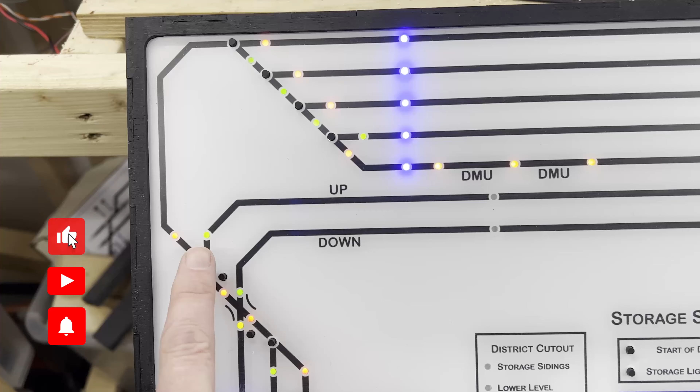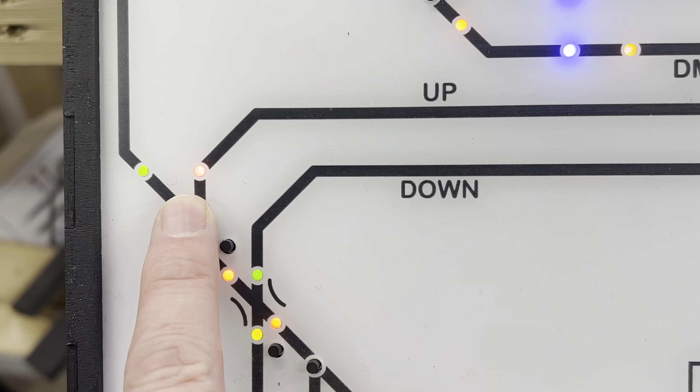This is the control panel that I purchased from Megapoints. It's a really nice panel, but when I looked at them again, I think they got really expensive. I'm not sure if he's still doing these panels, so I decided to try to make my own using the Bambu Lab 3D printer with the AMS option. So we're going to have a quick look at what I did.

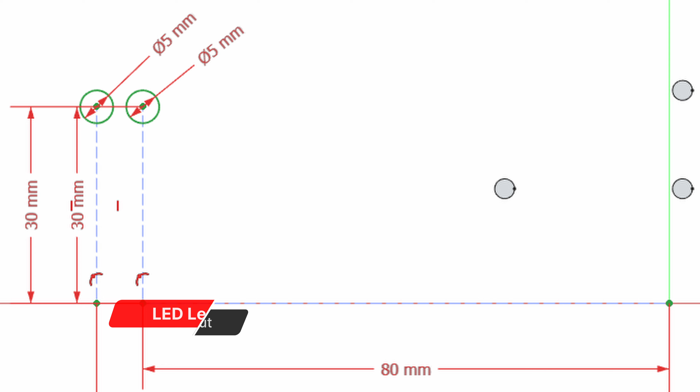I spent a long time trying to create this, and I realized that I needed to create lots of separate parts which I could mark as a color inside the Bambu Lab software. So I used FreeCAD, which actually is pretty good. I moved from Fusion because it just got really complicated, and I made lots of separate parts.

I had to print out the parts in kind of a 3D drawing so I could replicate this multiple times, effectively making a bit of a jigsaw puzzle. Bits could slot in - like this section here was built because I needed to make sure it was black, so I had to cut the circles out for the switches and the holes out for the LEDs.

I also had to make little separate parts for the LEDs so I could color those with a translucent filament. It all gets exceptionally complicated.

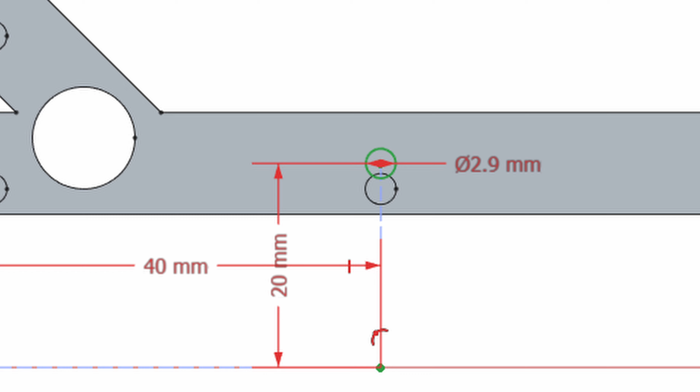So I had the actual holes for the LEDs so they could be a friction fit, and then the little kind of 1mm thick tops for them, so to speak, which would be the lens, the translucent stuff.

As I said, this took me a lot of time to do, probably months of playing around in the evenings and getting frustrated and starting again, and some test prints, should I say. Overall, it took a long time to actually get to the point when I was happy.

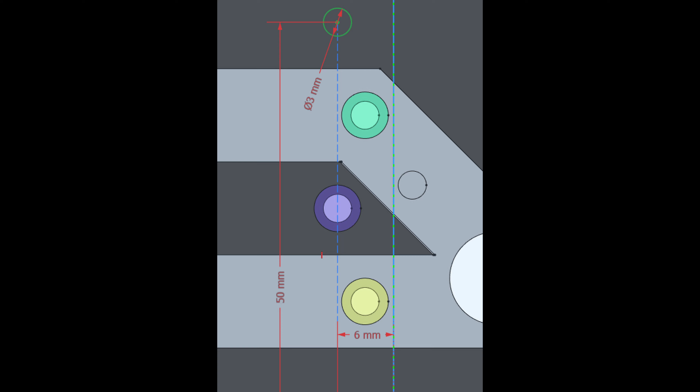In FreeCAD, you can create colors and you can sort of emulate what the lenses would look like. Made sure that I knew what I was doing. Here's a few more screenshots of what I was attempting to do.

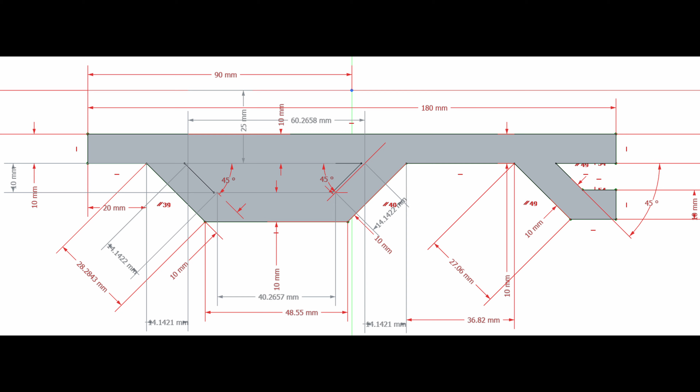This would be the lower half of the control panel as a separate piece. This was designed so I could have a black section which would be cut out of the white overall square. In a moment, we're going to look at the 3D print job from the camera.

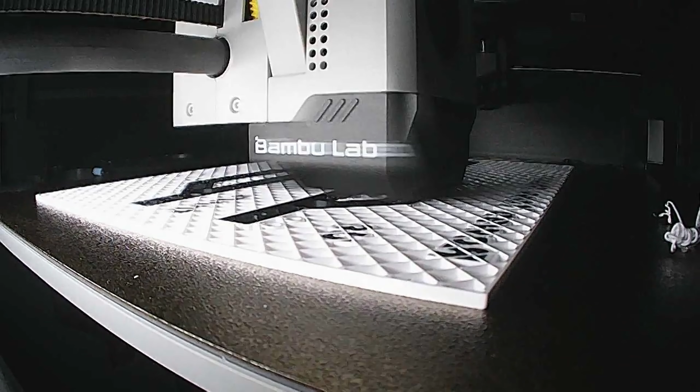It's very quick, but what I did realize was that the way the system runs is it effectively prints black first, which left a little bit of streaking on the panel that you'll see when you see the actual end result.

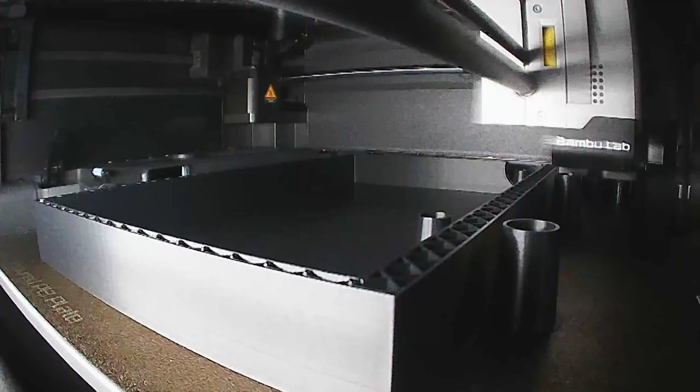But what I found out later on, after I'd already wired it all up, so I really couldn't be bothered to do it again, was that you can actually tell the system what color to print first. So if I'd told it to print the white layer first, then the black, and then the clear, I wouldn't have had any issue with the color bleed between it.

I then designed a couple of times a control panel holder. This was quite big, I had to print it in a couple of goes and join it together. I needed it to hold my two CANPANs inside, and I wanted to put some ventilation on the side because they do get quite hot.

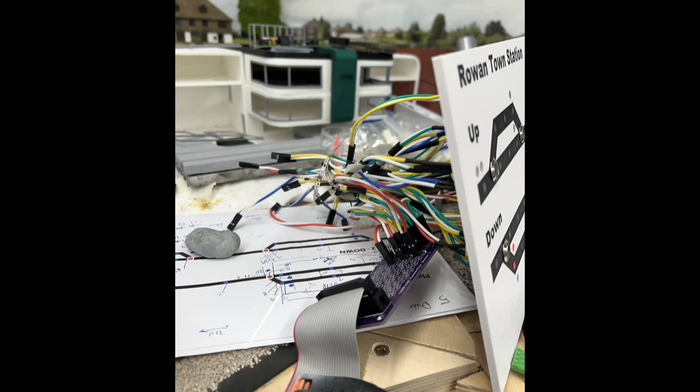I put a little shelf in there as well to hold the CANPAN adapters that I use so I can get the actual plugs in for the LEDs and the buttons. That adapter you can see is the purple PCB board, which has got the ribbon cable going into it, and then lots and lots of cables coming from LEDs or push buttons.

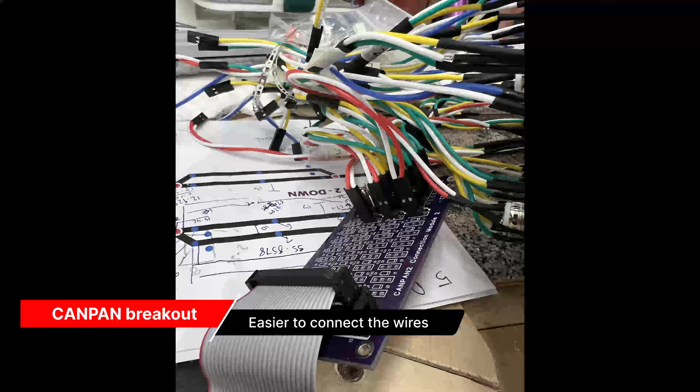So this is it being tested out of the system. You can see you've got the colors - the red, green indicators are in there. There's an indicator there for the signal as well.

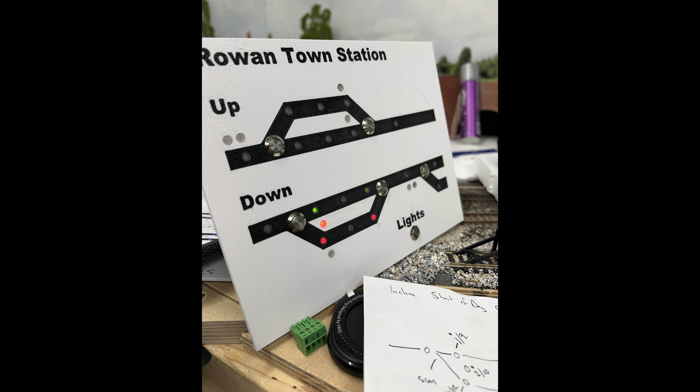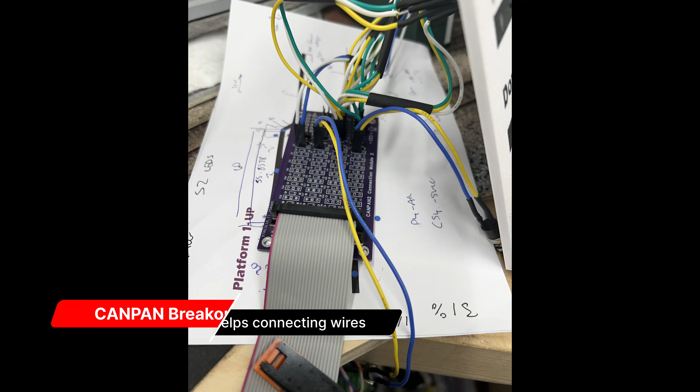Some of the signals I can't actually see on the layout themselves unless I'm leaning over. Again, that's the control panel breakout board, basically, I guess you can describe it as. If you look carefully there on the top right, you can see what I mean with that little black line going up, sort of like to, I don't know, 10 o'clock.

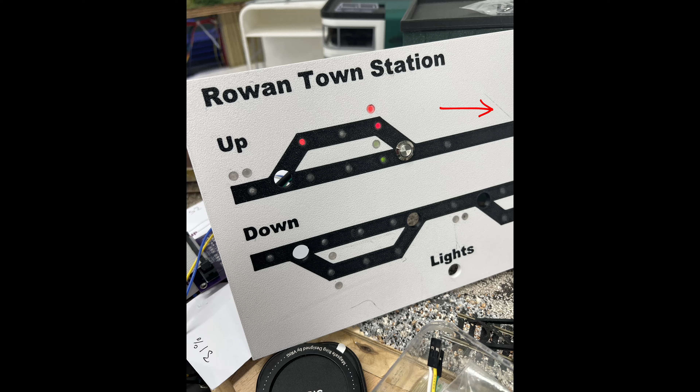It's just a bit of black filament that came up loose on the end of the nozzle when it did the initial print. This is a close-up of the board - you can see the black mark on there on the bottom track layout.

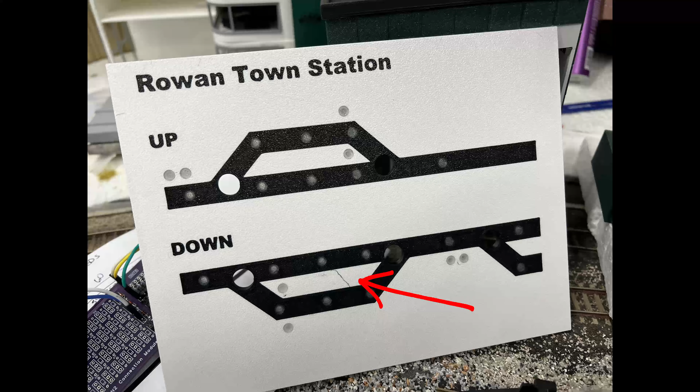Here it is in a loose form operating the bottom level. I did buy some pre-made red-green LEDs, but some of them didn't work. I ended up taking the ends off and reconnecting them myself, terminating them.

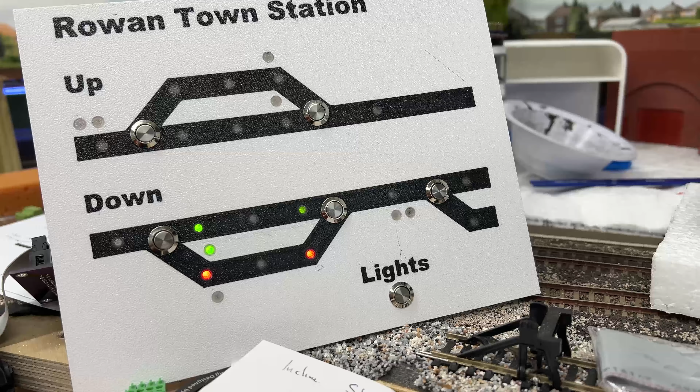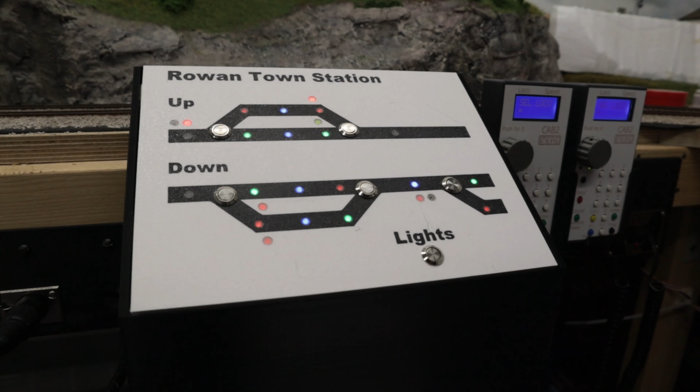Here is the control panel connected up and operational. The actual control panel, the white part of it, is just connected to the base part using magnets. It means it's easy to lift up if required to do any maintenance to the cabling inside.

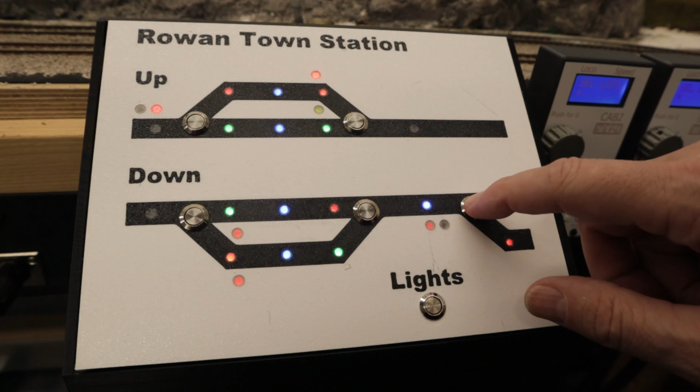It's also connected to the layout itself using 2 big screws with some bolt heads, sort of rounded heads on it, so I can push it in and slide it down to hold it in place. Now here it is in operation.

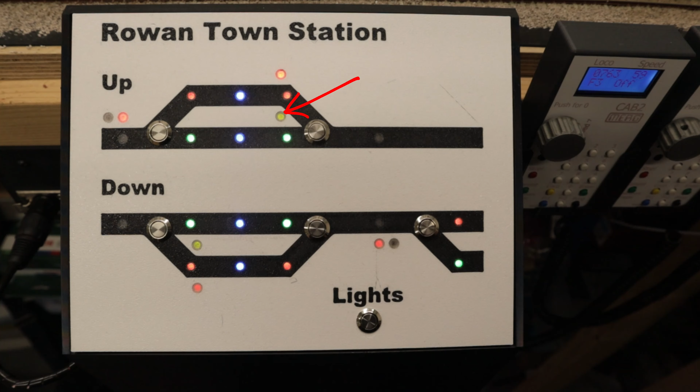We're just going to depart a train from the up line on the through line, as I call it, and hopefully you should see the blue dot in between the 2 buttons at the top go off and the one on the right go on, and possibly the green signal just to the left of the far right button changes to red. There you go.

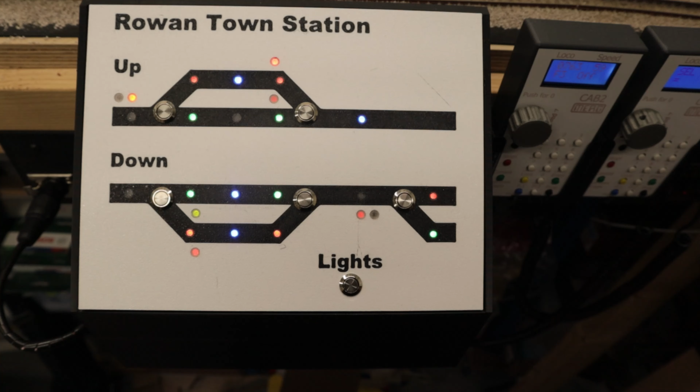So it's operating as expected. I think at this point there was a couple of issues with some of the other block detection, but that was all to do with some configuration within what was the FCU and the MERG modules, just to make sure that all the communication was working correctly.